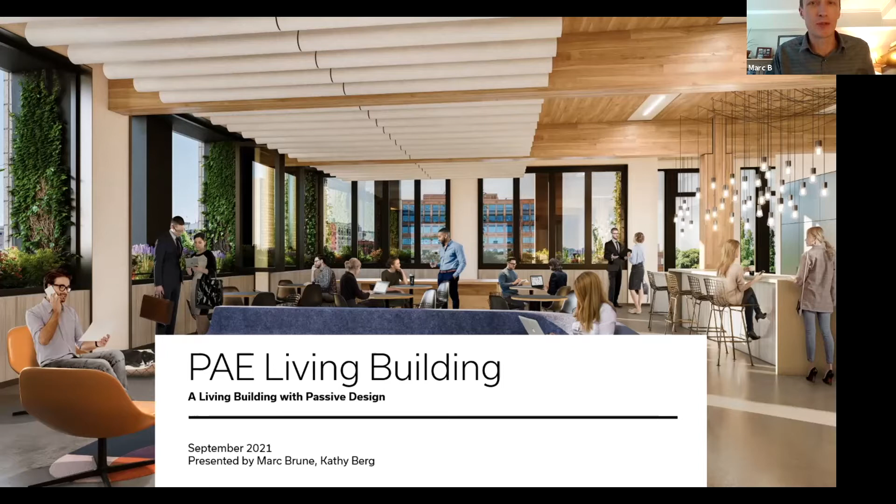Just really briefly about PAE, we're an MEP consulting firm headquartered in Portland. So this is going to be our new corporate headquarters. We have about 200 people in Portland, 350-ish overall, and 4 offices up and down the West Coast, basically.

So a little bit about ZGF. As Mike mentioned, we have 6 offices, 1 in Vancouver BC, the rest stateside: Seattle, Portland, LA, DC, New York. And we really cover a lot of different project types. But one of the fundamental drivers for us as an organization is maximizing human performance, looking for projects with deep sustainability goals, focusing on equity in architecture, and the integration of technology.

And one of the reasons we were really excited about this project is that when Paul and Marc called and said, hey, do you want to work on this with us, it hit every one of those targets.

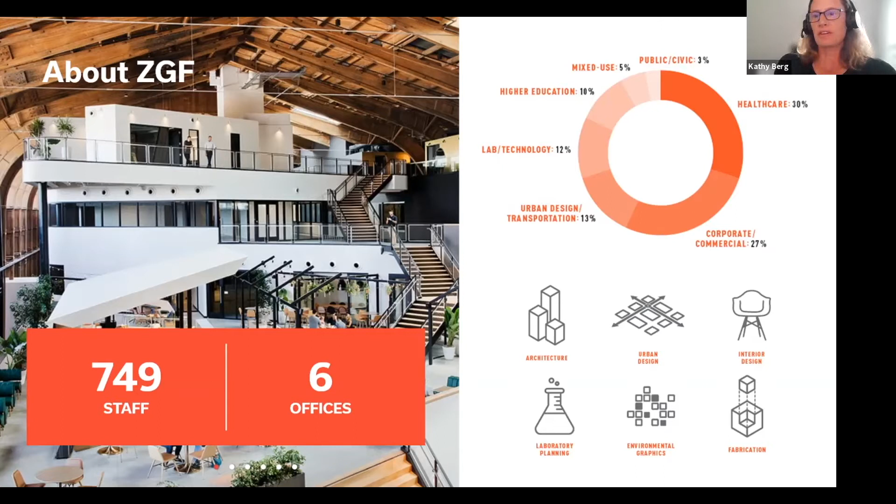So the living building that we're building is 58,000 square feet. We are seeking full ILFI 3.1 certification, so all of the petals. One of the things we're really proud of is that we started kicking the tires on how long it was really designed for. We really believe that with proper care and maintenance, this is a 500-year building, one that we hope PAE is in for a long time to come, or someone else who loves it just as much.

And the final driver as we were working through the design, not just focusing on LBC, but also making sure we were developing a project that was something a developer could invest in. We don't want these buildings just to be something for a foundation or a private entity who can afford to put a little extra money in. We wanted to make this appealing to everyone and get more of these out on the street. And that drove every decision as we went through the project.

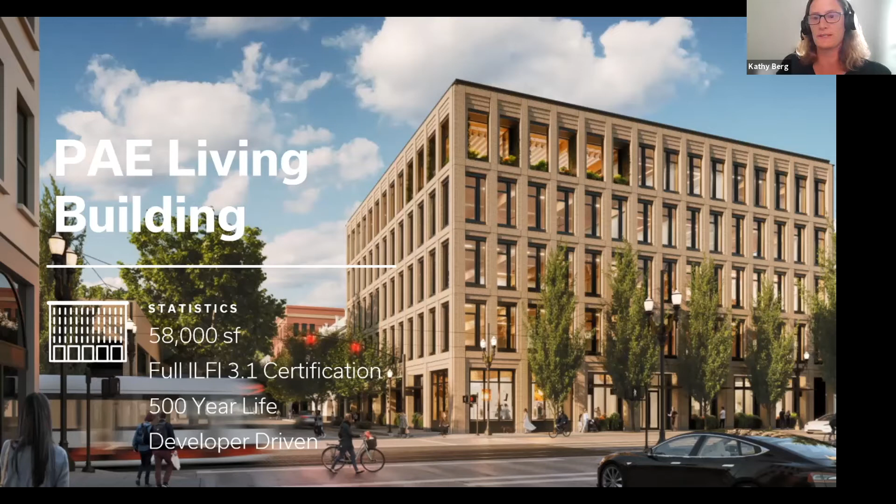The design team had experience in this realm. PAE, you probably are familiar with, had worked on the Bullitt Center in Seattle and were living in it, so they truly understood the value of such a building. But most of the design team members had also worked on a living building for the Rocky Mountain Institute in Colorado. This is a PETAL-certified building that is operating energy positive, and it was one of the largest PHIUS-certified offices in the US and the first ever to receive PHIUS 2015 certification and Source Zero certification.

So we'd gotten into this, we'd started digging into this. This also had mass timber structure inside of it. So there were a lot of lessons learned that we were able to carry forward from the Bullitt Center, from the Rocky Mountain Institute, into this project.

And I think moving to the team, that's one of the most important things about this project, was putting together a team who, first of all, everybody at the table was passionate about doing a living building and making this happen.

Nobody at the table was willing to ever say no. So with PAE really driving this, not only as the owner but also as an investor and as the engineer, was critical. ZGF, Edlen and Company were also investors in the project, as well as bringing our expertise for architecture and development. KPFF was our engineer from Rocky Mountain Institute, and so again had lots to bring forward. And then we brought on Brightworks, Biohabitats, and Walsh Construction for the heavy lifting of building it. So it was just a phenomenal team all the way through.

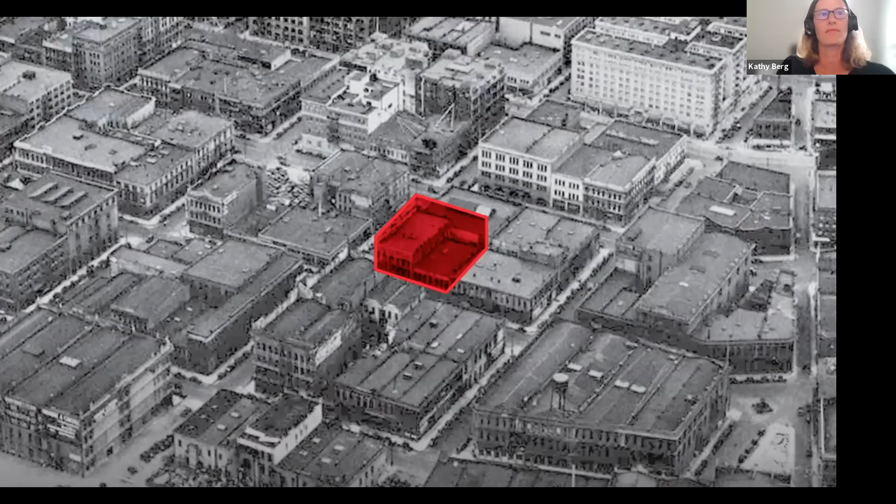This is our site, in a historic district in Portland, Oregon, about 3 blocks off the Willamette Riverfront. This is the building that was originally on our site, called the Reed Block, from about the 20s or 30s. At some point this particular building was torn down—we're not exactly sure when, but somewhere in the 40s or so. And since then it's been a parking lot, so a really underutilized location for the last 70 years.

We started construction on this site in April of 2020, just in time to hit COVID, ice storms, wildfires, clashes in Portland—you name it. We have lived through just about every unrest. It has been a construction phase of biblical proportions, if you will, but somehow we've made it through. So as Mike mentioned, PAE is currently moving in, and we're really enjoying seeing how they're settling into the space, even as we're still buttoning up the last elements.

From a living building perspective, one of the requirements of a living building challenge building is net positive energy. We have to produce at least 105% of the energy that we will consume on site with new renewables that ideally are on the building. We'll talk a little bit about how we're looking at that, because we're taking a little bit different take on it. We have a super efficient building with an EUI of about 19 or so, is what we're modeling. And like Mike said, for the Living Building Challenge you actually have to prove it, so it's after a year of operation that you can get certification. We're modeled at 19.5 EUI.

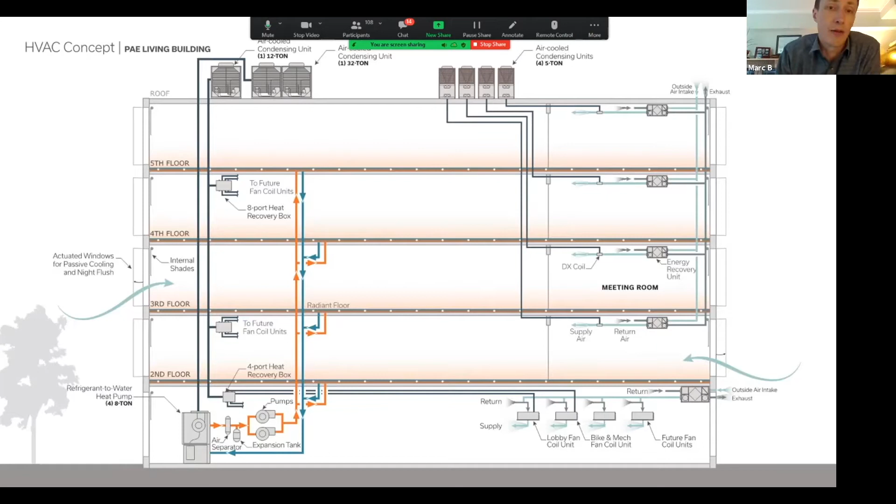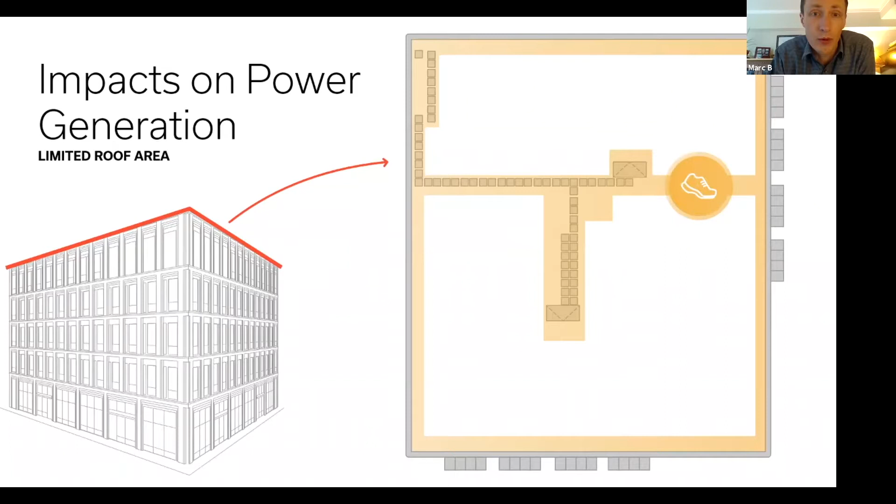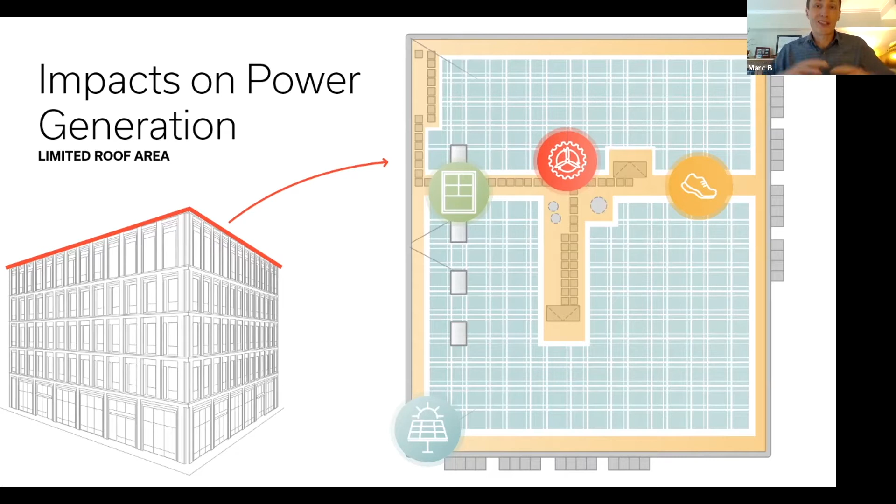Getting to the roof, there were a lot of demands on the roof. We have 133 kW of solar on the roof, and there were a lot of restrictions on the solar. Other 5-story living buildings that have 105% energy generation requirements typically have big overhangs—the Bullitt Center has 15, 20-foot overhangs on some sides. The Rocky Mountain Institute didn't, but it was a 2-story building, and we had just a ton of solar generation for the square footage, so we were limited. We couldn't do overhangs because of the historic district we were in. Design requirements wouldn't allow any PV to be seen from down on the ground, which meant we couldn't elevate it up, which meant that now we needed walk aisles for the fire department around there—it's kind of in yellow as all our walk aisles.

We also had a utility restriction on the PV. We're in a downtown area network where the conventional wisdom is you cannot backfeed at all into a network grid. We actually negotiated with the utility to allow a limited backfeed. We have 50 kW that they're letting us feed back into the grid.

And then we have a microgrid system that is controlling that. So we have a battery, a 250 kilowatt-hour battery. It's worth about, if you think of the energy in 3 Tesla vehicles, that's about that much energy. So we can soak up all the power on the weekend when we don't have the load for our PV, and then meter it out slowly throughout the day.

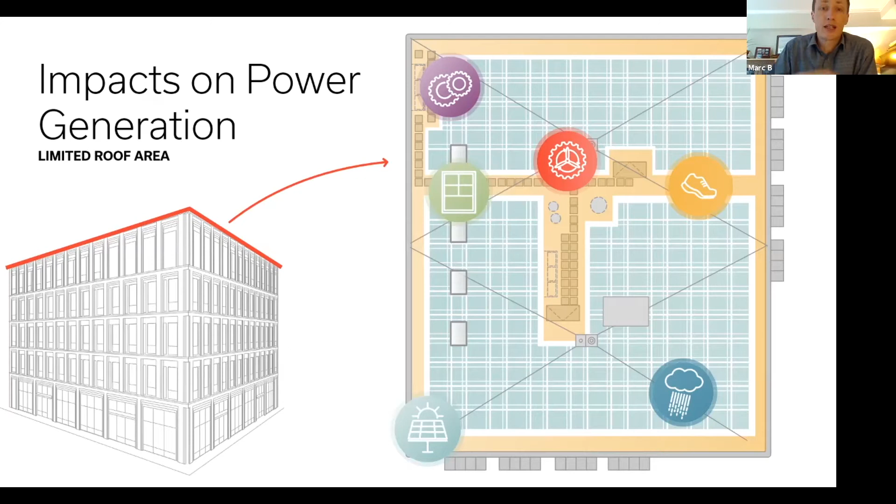The roof surface is also our rainwater collection. We have a net positive water requirement that I'll talk about. So just a ton of demands on the roof, and a lot of PV up there.

The PV is actually in a sawtooth pattern. It's facing east and west, which is a way to maximize our area of PV that we could get on there. It actually maximizes the generation we got on the roof rather than everything facing south. And this is a little less than half of the PV that we need for our net positive energy.

We would have needed about 350 kW or so of PV to get to net positive, but because of those limitations I mentioned, we couldn't get there all on site. And this was something we had to kind of wrap our minds around — the building owners and the people that showed up with this project say, hey, we want to build this living building, we want it to be net zero energy, and it's like, wow, we can't do it on site.

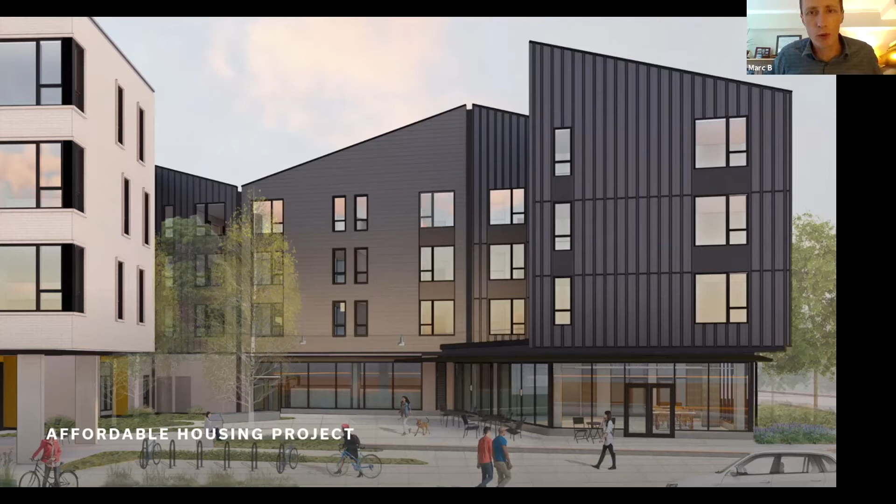And Walsh actually helped connect us with this project that they were building in North Portland. It's about 5 miles from our site. It's an affordable housing project. And what we ended up doing was making an arrangement with this project — it's Reach Affordable Housing — to donate a 210 kilowatt PV array to Reach.

So it powers the Reach building. They actually get their meter spinning backwards, they get the value of all of the kilowatt hours, and we get the renewable energy credits. And from a project standpoint, there's additionality on the grid of PV going under this project and ours, that's enough to get to our 105% net zero energy operation.

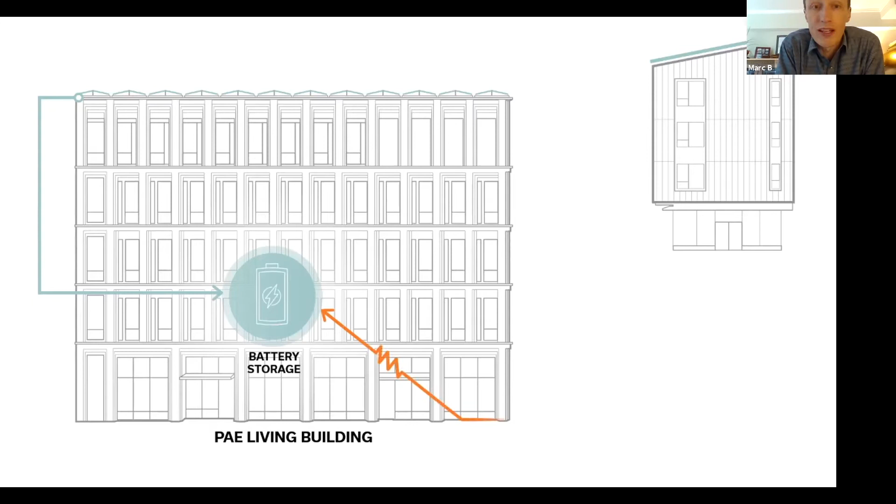We're buying renewable energy for that sort of excess that we need at our site. So from a global renewable energy credits standpoint, there's enough for both of our projects, really. And we're connected to the same utility grid, so from a grid standpoint, the grid really doesn't care whether the PV is on our building or on another building.

I'm really excited about this arrangement now, because all too often I feel like super sustainable projects have been a bit of a privilege to be able to build, because it is expensive to put a lot of PV on. With this approach, we're combining the sustainable aspect with a real tangible social benefit at the same time. And I'm hoping this shows a different paradigm for urban constrained buildings, because I do want every building in Portland to be able to get to net zero if they wanted to. This is one way you could do that.

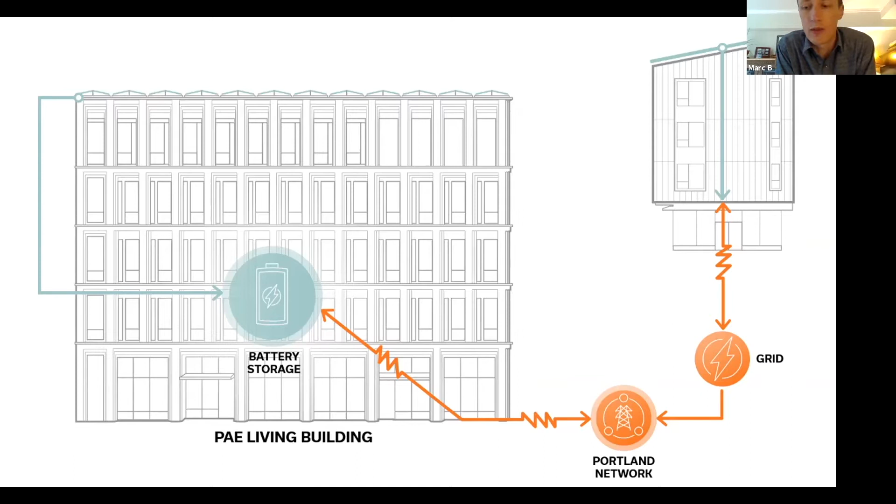The other side, and I'll try to move quick through this, is the net positive water. So we harvest all the water from the roof of the building. It flows to a 71,000 gallon cistern that is the only thing that's below our building other than the ground.

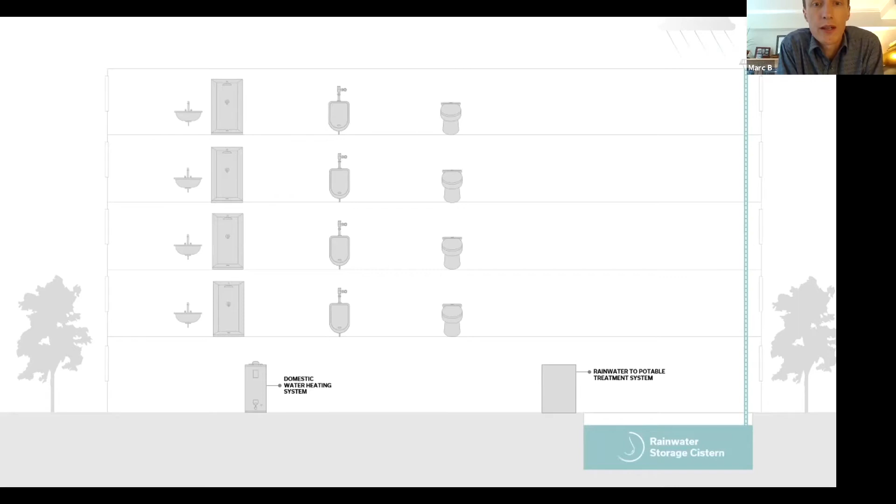We treat it kind of like you would when you go camping. We've got a super fine filter that we run it through, we add some UV to it after that filtration, then we have to add a little bit of chlorine that flows to all the fixtures, the labs, the showers, where people will use the water.

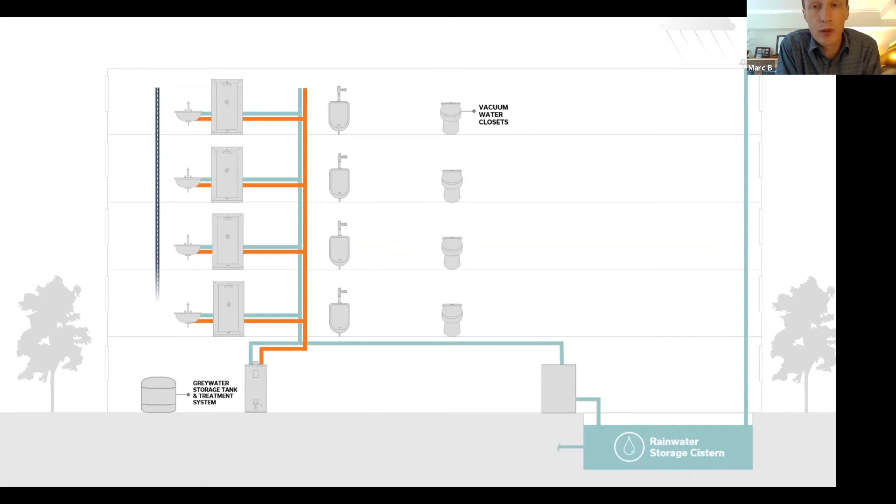From there, it runs down into our gray water storage tank, so we treat it again with a fabric filter, and then send it back to our water closets and the hybrid urinals that we have. The urinals flush about once a day just to keep the traps clean.

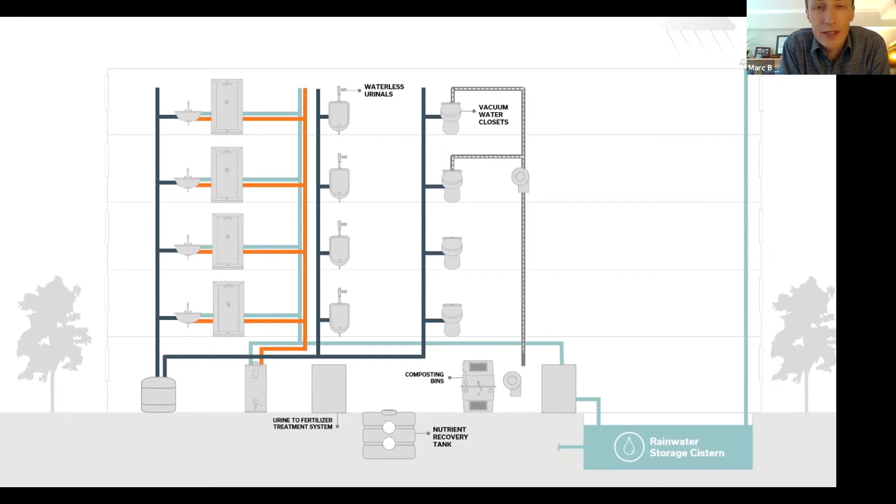The water closets are vacuum flush, which is a pretty unique system for just about any building, but it's a 5-story vacuum flush system. It has a bit of a similar experience to being on an airplane. Uses 1/10 of a gallon per flush.

It sends it all down to a sump, and then it gets distributed to the 20 composters that we have in our building. There's 20 big 7-foot tall composting bins, and it distributes it evenly between all the bins, which was a lesson learned from other living buildings that we've worked on.

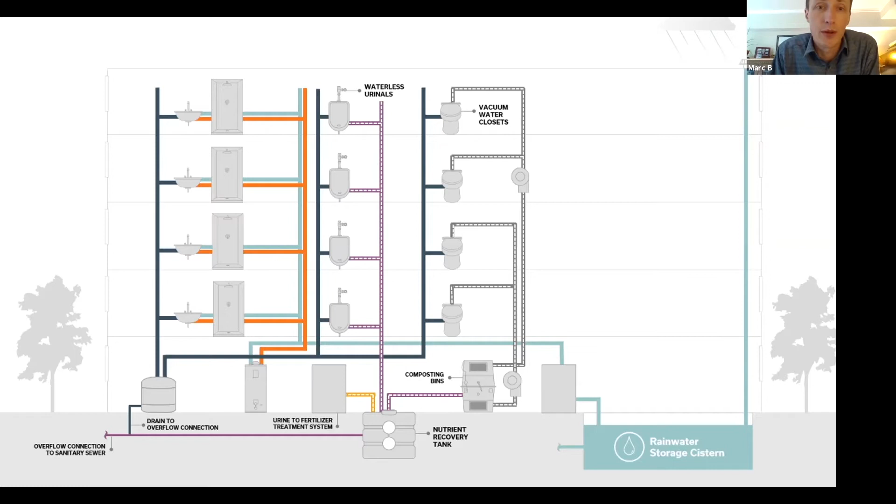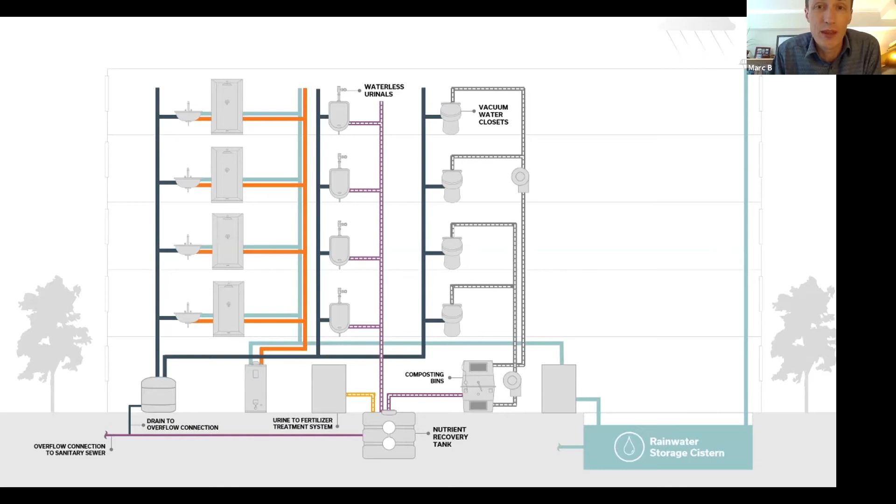So we kind of close the loop, I guess, in the end on the nutrient cycle of collecting water on the roof, and then hopefully really generating compost that can rebuild soils rather than just sending it to the municipal treatment plant and dumping a lot of those nutrients back into the river.

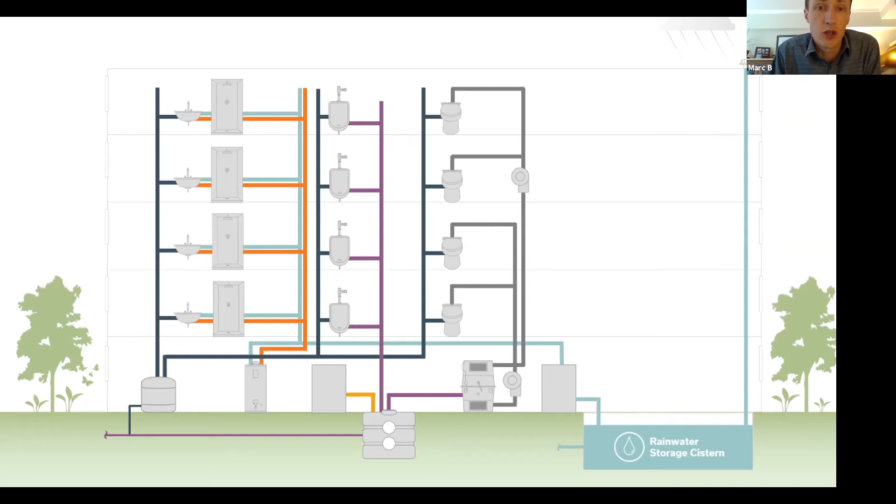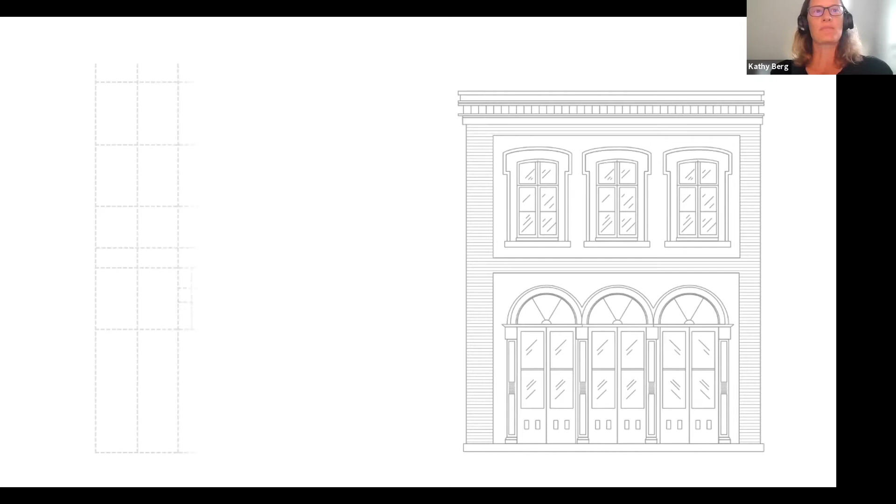So looking at the design, one of the things that we really prioritized was thinking about the location in the historic district, and also how that historic district would coincide with all of the energy and performance goals that we had. One of the proportional guides used throughout the historic district is the golden ratio, a proportion found in nature everywhere from galaxies to seashells. We tracked that ratio back through a lot of the historic buildings and proportions, and looked at how we could carry that forward to our building.

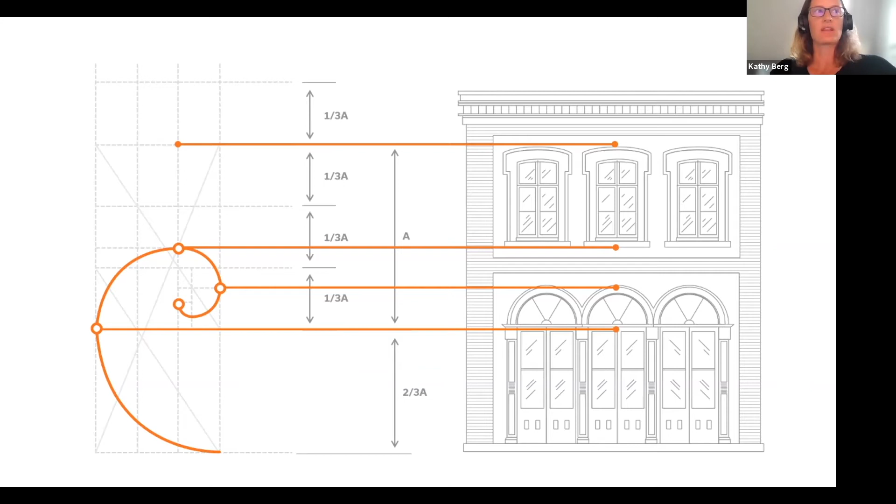So when you look at the district, one of the things you'll notice about many of the buildings is they all have this proportion of larger ground floors, proportional center floors, and then a lot of detail at the top. Most are also built the full block dimension, coming right up to the street edge. Those were things that actually worked well for us, as we were trying to maximize the footprint we could fit inside, but also the proportions of these windows and openings, and how they would work with our energy systems.

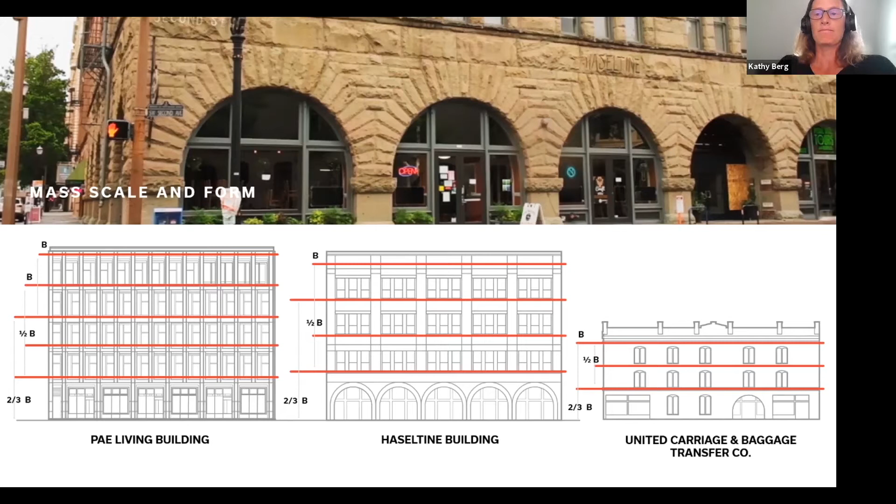Another benefit of the site was the height. As Marc mentioned earlier, a 2 to 5 story building can really work within the water and energy resources it can receive, and serve the power and water needs inside. As you go beyond that, the site becomes very difficult to gather the resources you need. So this 5-story building worked pretty well once PAE went through and really sharpened their pencil on energy loads and how they could get the internal water and energy reductions in the way the building operated.

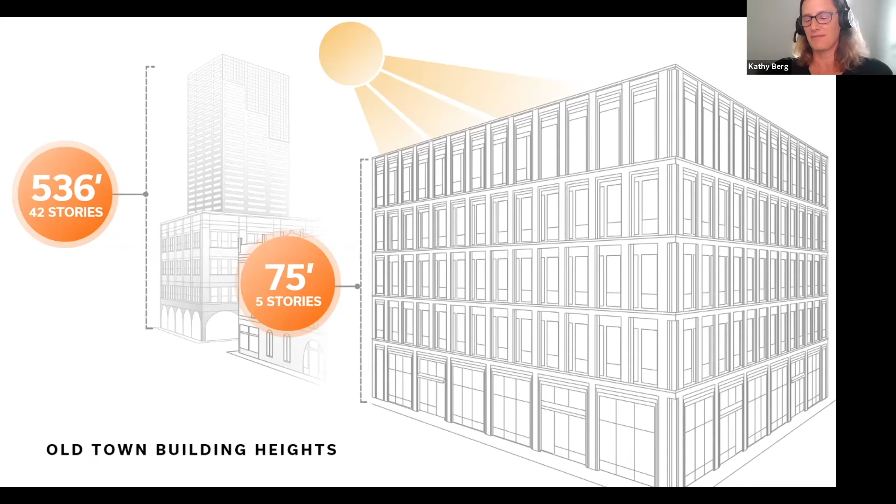We were able to make the water capture on site work, and Marc talked a little bit about the energy, splitting it between this and the REACH project. The other thing that the 75-foot height meant was that we were assured to get the solar access long-term. There won't be a building built nearby that is taller, so we know we won't get blocked, which was very helpful.

As we look at those historic buildings, they had to meet the same requirements that we do today. So even though they were 100 years apart in development, they were also focusing on daylighting, natural ventilation, and passive cooling, because they didn't have the mechanical or artificial means to create that when they were built. The fact that they were dealing with the same concepts as us today meant the look and feel of our building really aligned with the district.

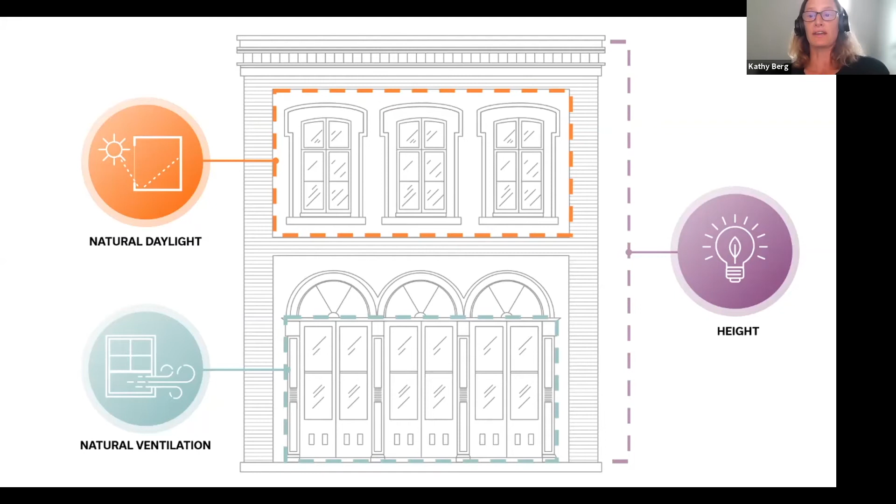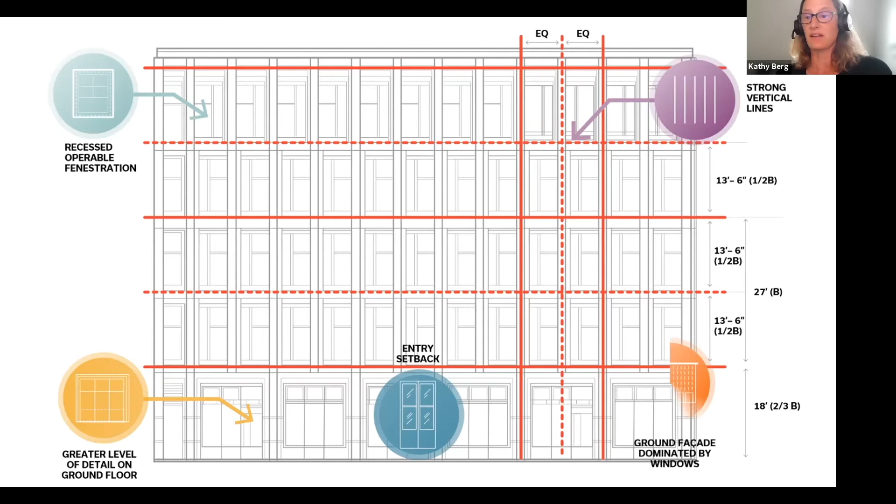So looking at our exterior envelope, you will see a lot of the same characteristics as in the district. At the ground floor, you see a greater level of detail, with entries set back. You see these strong verticals and horizontals that articulate a very repetitive frame, characteristic of the Italianate cast iron district it's part of. The ground facade is really dominated by windows, with clear delineation of the floor lines. Then at the upper level, you see recessed operable windows and real detail at the cap, at the parapet.

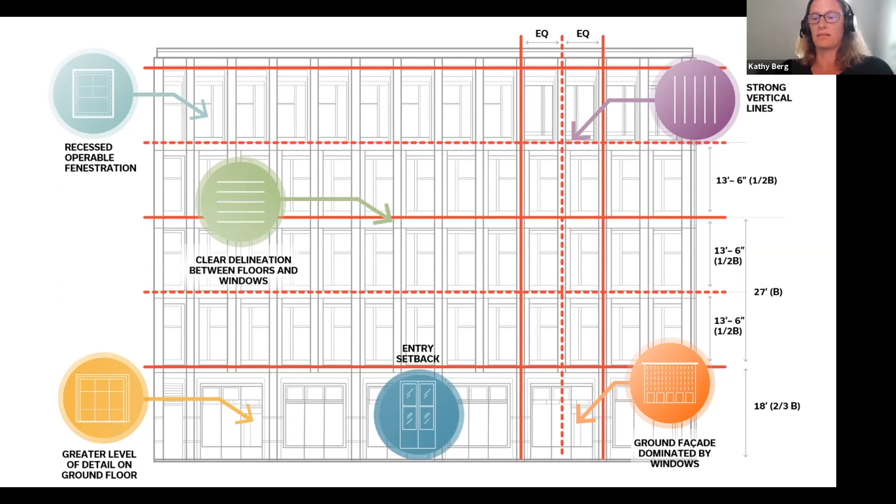In terms of materiality, one of the requirements of the Living Building Challenge that's much stricter than most other labels or certification systems is to select materials that are red list free, meaning they do not contain some 23 to 26 chemicals of concern. This actually aligned really well with the historic district, because many of the materials used historically are of the earth.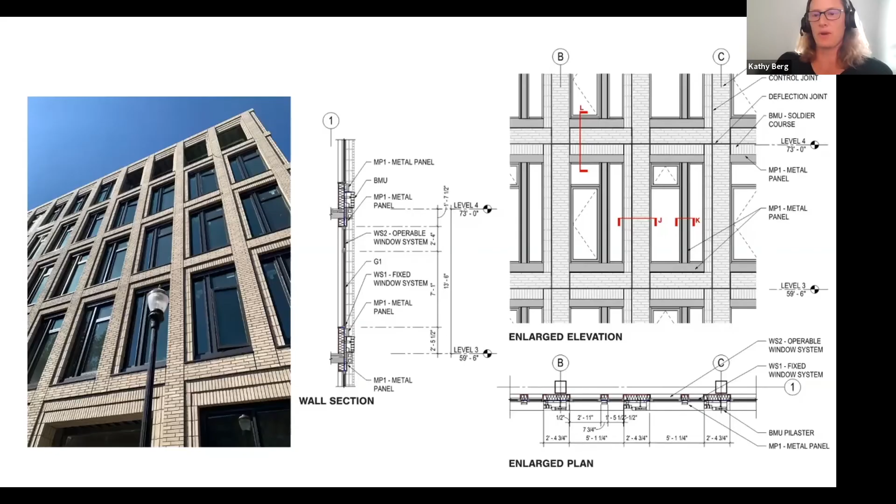So the masonry was a very easy material to select, as it was pretty easy to find red list free. We also have insulated glazing units, aluminum storefront at the ground level, fiberglass windows from Cascadia at the upper levels, and aluminum panels infilling around some of the windows. That was probably one of the harder materials to source red list free, to be honest. The painting is still an area where it's easy to get the paint, but not always easy to get the primers. So that's one of the things we're learning in terms of the wall assembly.

For those of you who want to geek out on the detail bits, we've got a couple of images here.

Our window assemblies are actually pretty complex and took a lot of back and forth between the engineering team and the architecture team. The top awning window that you can see in the bay is operable and swings out, actually on an actuator tied to the MEP system to support night flush. The larger casement window is accessible to the desks and occupants inside, so they have the ability to control their internal environment and have that direct connection to nature.

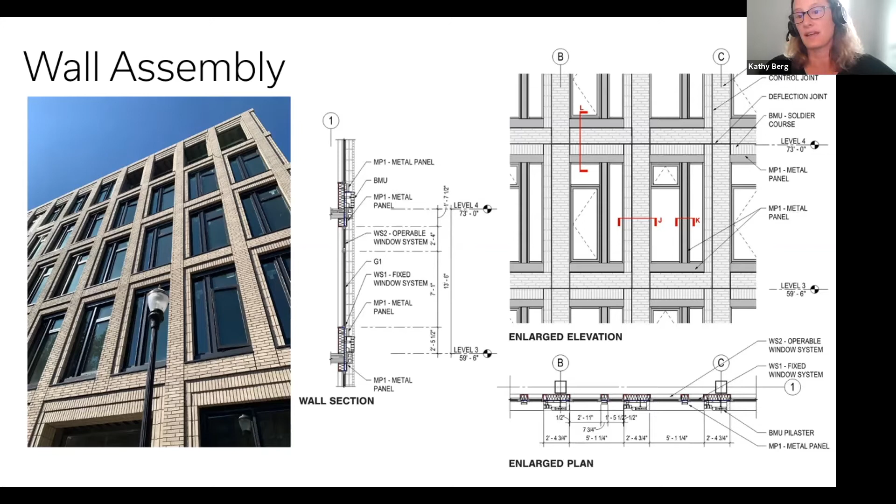I can tell you the glazing area is just barely under 30%. That's not the total window frame, that's literally just the face of glass. And the reason I know that is because Portland has implemented a bird-safe requirement, and the glazing would have needed to be covered with some sort of dot pattern or film if we exceeded that 30%, because there are a lot of statistics showing bird strikes in that area. Since that wasn't really in keeping with the historic district, we chose to stay just under that limit, and it became another one of those performance tools. We were constantly measuring back and forth to make sure we had the daylight but still had the energy performance. The next slide will show a detail of how those assemblies come together.

So here you can really start seeing the brick detail that we played with. There's a lot of it. We worked directly with the masons to try to optimize what we could do, how far we could move those bricks, how much shadow and texture we could get. So we really got that feeling of a modern building with the detail you would see in a historic district.

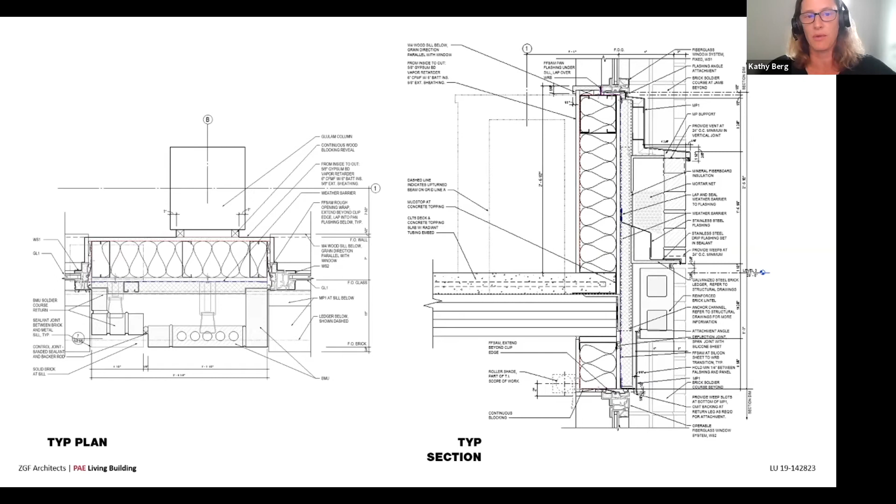To get our envelope insulation, we combined both rock wool and batt insulation that you can see here. We also selected things like stainless steel flashings, first because it helped us achieve the red list, but also because stainless steel would get us towards that 500-year building. So between the brick veneer, the stainless steel, and the mass timber construction I'll talk about in a second, we were really looking at systems that could last for a very long time and have proven in other cultures around the world to last for 500 years.

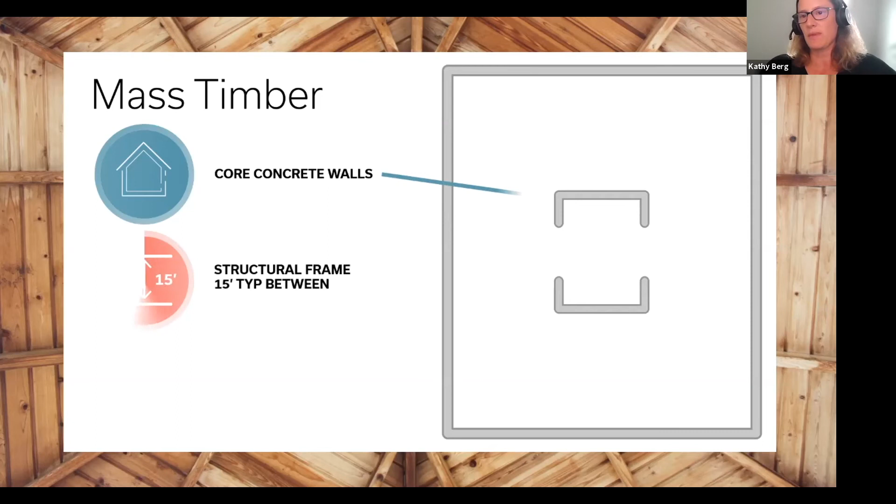Structure was a really interesting one, and this was a great opportunity. We knew we wanted to embrace mass timber. It's a Pacific Northwest sourced material. It's beautiful. We knew we could use the structure exposed, so it removed a lot of other cover-up materials we had to use. But we also knew we had to be cost effective with it.

So we did combine it with concrete core walls and a 3-inch topping slab that runs the radiant heating and cooling that Marc referenced. And we worked really carefully with that mass timber to create mechanical chases that we could organize, running conduit and fire suppression and things within.

As we were studying the mass timber system, we realized that because we were on a tight urban site located next to other buildings, if we had designed in our earthquake-prone zone to category 3, which was required by code, we would need an 8-inch separation between the two adjacent property lines. But if we went ahead and spent the extra money to make the building more rigid—which wasn't overly expensive because a timber building is fairly light and easy to make rigid—we could actually reduce that gap to 4 inches. And the trade-off was that increased the amount of space that could be rented.

So from the pro forma standpoint, the developer was able to say that the increase in structural cost would pay for itself in a very short period of time. That's another reason we feel this is a 500-year building: that structural upgrade means that in an event, the building's structural system will remain operational with little to no damage that needs to be addressed.

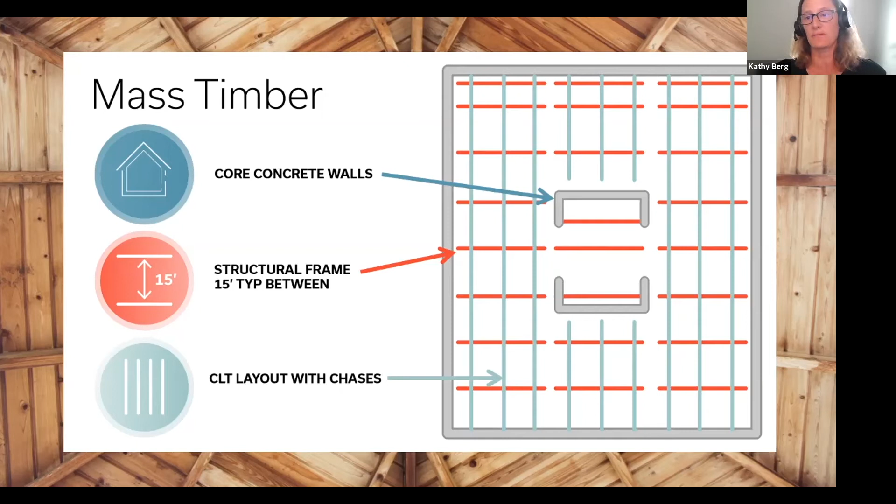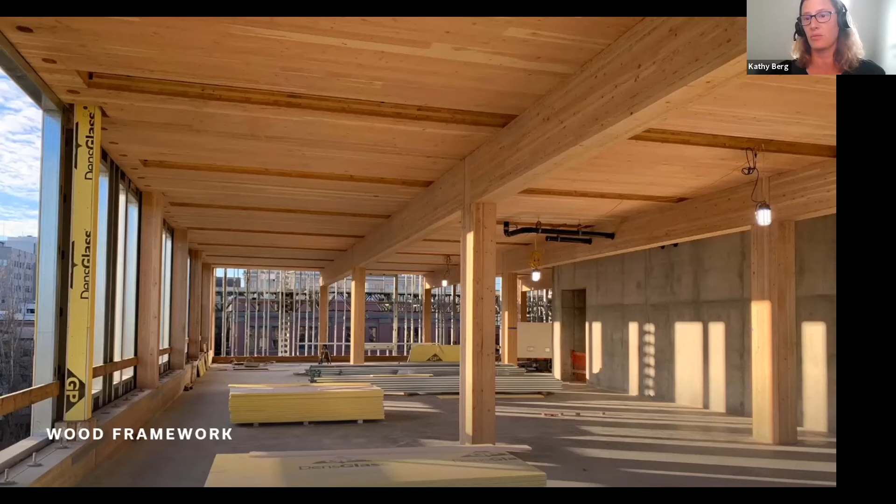So that's that 4-inch spacing that we were talking about as a real benefit.

Sorry, Kathy, I was jumping around there.

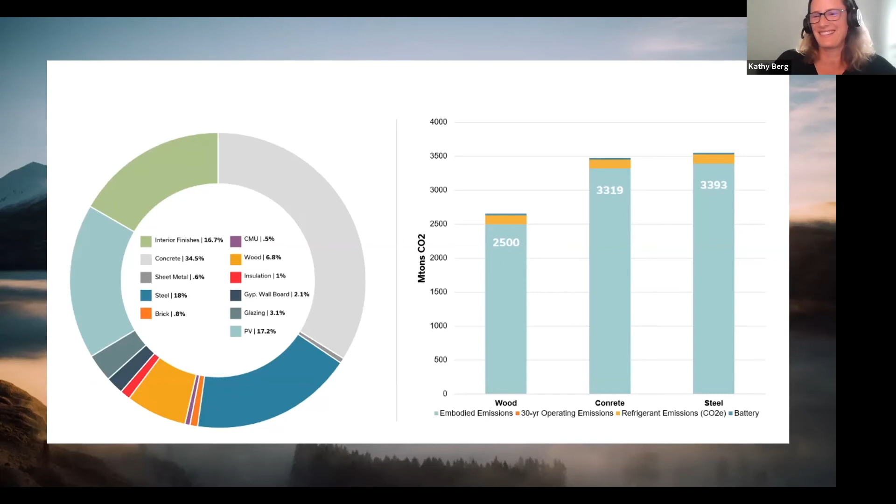Okay, we got that. I can jump in on this a little bit. One of the other things we looked at was the embodied emissions of the building, and we're around 2,500 metric tons of CO2 in our building. Because we're an FSC certified, sustainably harvested mass timber building, there was a real reduction in the embodied emissions of the materials we put in the building. It was about 25% or so.

Early on in the schematic design phase, we had put together a bill of materials. Walsh helped us do this, of concrete and steel and wood. We were really still trying to decide what we wanted. We all wanted the wood building for the look of it and the natural materials, but we needed to make sure we could price it out and that it made sense, and we were able to get there. But it gave us an opportunity then to take that bill of materials and ask what the carbon impact would have been of the others. That was how we backed out sort of the 25% benefit of our wood structure.

The interesting thing to me is, in that donut chart to the left, that's the breakdown of our wood building and where all the carbon is embodied in our structure. There's still about a third of it in concrete. So looking forward to the next living building I hope to do soon, concrete is by far the low-hanging fruit still. Can we do concrete or wood rocking shear walls potentially? Can we get an all wood diaphragm and eliminate the concrete from the deck of the building?

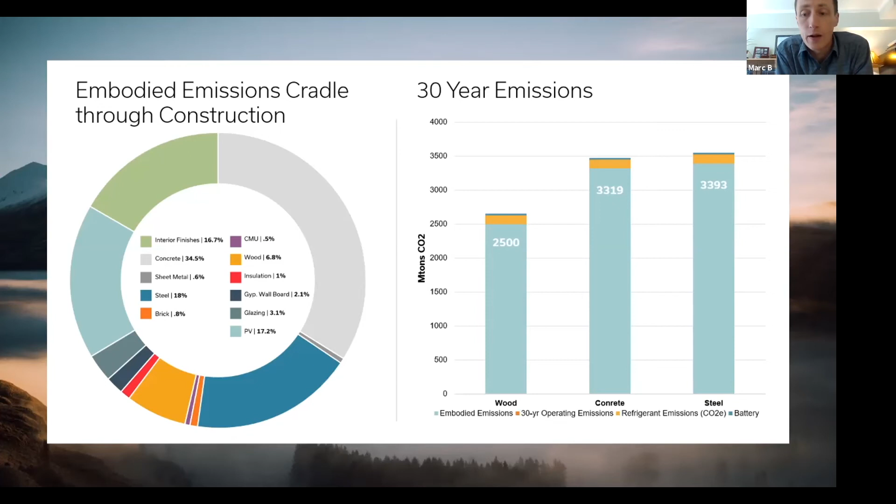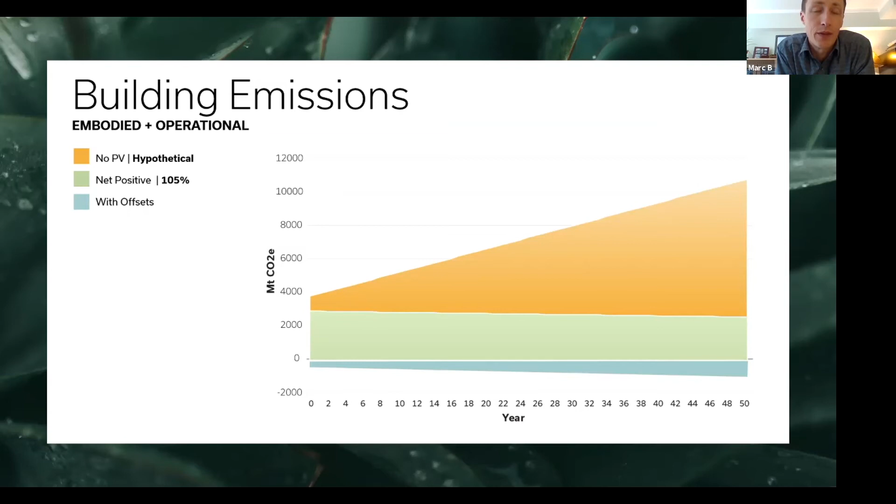So I think it's really critical for all of us as designers to look for ways to pull down the embodied carbon in our buildings, ideally to zero, which we did with offsets in ours, which is real. But I think we need to look for materials that make the need for offsets as limited as we can.

Yeah, I can speak to this really quick, if you want to add anything, Kathy, go ahead. But we have, at the roof of the building, urban agriculture, which is kind of a cool thing that's required as part of the Living Building Challenge. ZGF designed this amazing space for us that we're calling our deckany. There were so many demands on the roof that we really couldn't get a roof space where we could have an open space.

Putting the financials out there of what this cost us, it was about $435 a square foot total to build the building. The energy and water systems alone are about $50 a square foot, about 25 each for the water and the PV. But in the end, as a developer-led model, the upfront cost is really not what matters.

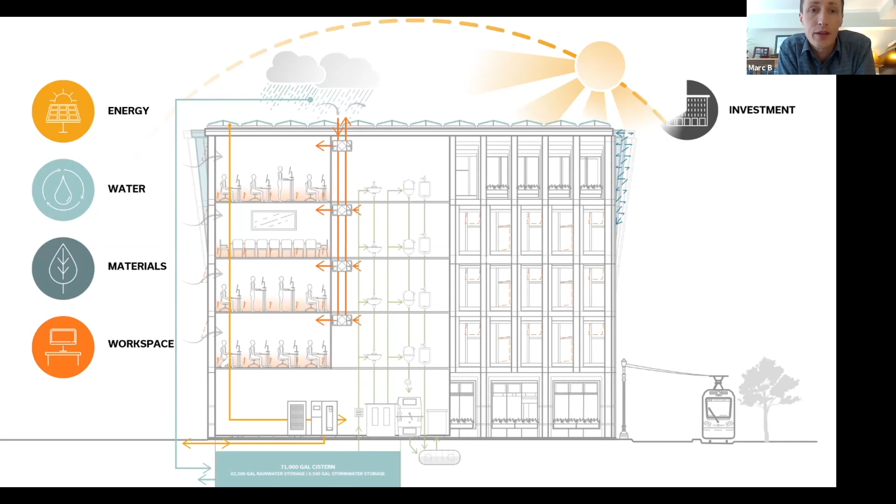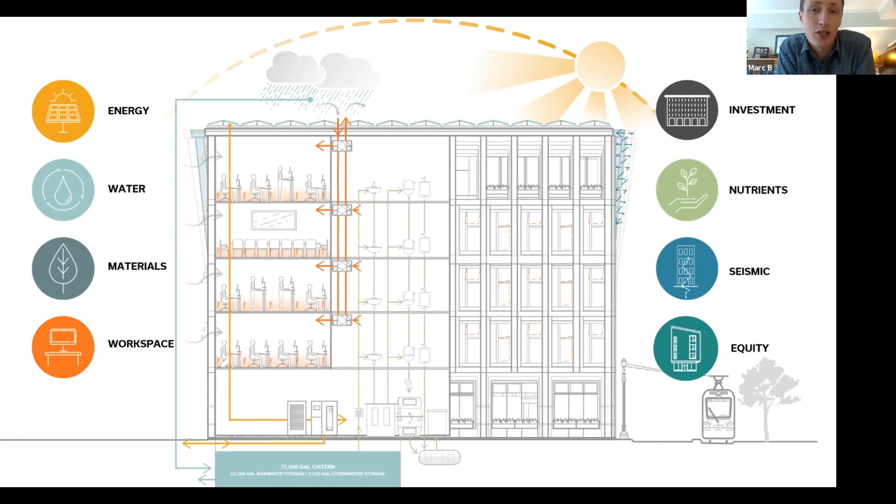So just to recap, we've got net zero energy, net zero water, red list free materials. We have a contribution to an affordable housing project. We have a 500-year building that's built to Category 4 seismic. And we did it all in a way that I hope other developers are paying attention to, because we think it's financially replicable. So with that, we can open it up for some questions.

Wow, Marc and Kathy, that was amazing. So before we dive into the questions, if everybody would like to unmute and give these amazing presenters a huge thank you and congratulations, please. Thank you, well done, cheers. Again, another project where the bar is now set up here for everybody else. So hold on, Marc and Kathy, have a sip of whatever beverage you're having. And Zach, over to you.